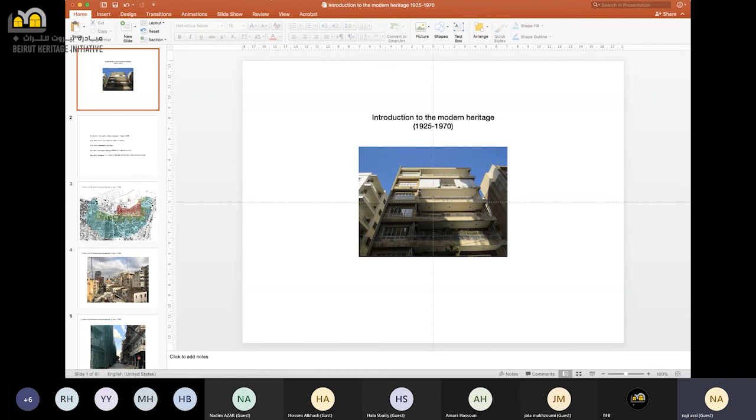All right, so we will be going through five chapters. An introduction that highlights the impact of the explosion that occurred one year ago on the city. Then we will have an overview of the modern heritage according to four periods, or sub-periods, historical periods.

1925 to 1935, what we call the interwar period, when we witnessed the integration of reinforced concrete in architecture. 1935 to 1945 coincides with the independence of the modern Republic of Lebanon as we know it today, during which we witness the French influence, namely Art Deco styles and affiliated styles and languages.

1945 to 1955, the post-independence period, during which we witnessed the work of architects and engineers who were actively taking part in shaping the city as we know it, or most of what we know of Beirut from that period. 1955 to 1970, the mandate of Fuad Chehab and the entrepreneurial state, during which we witnessed the spread of modernism and the international style.

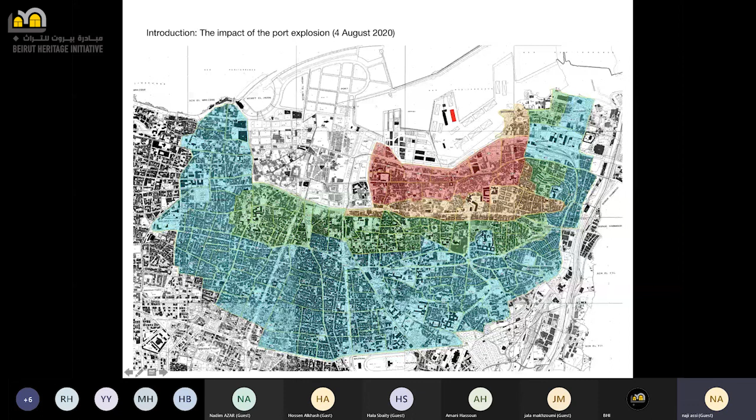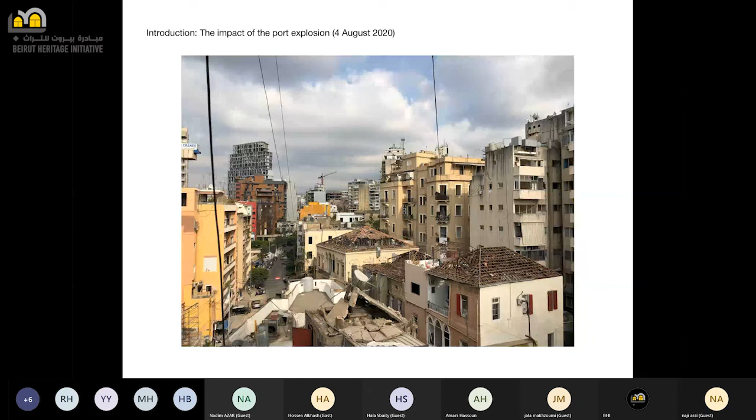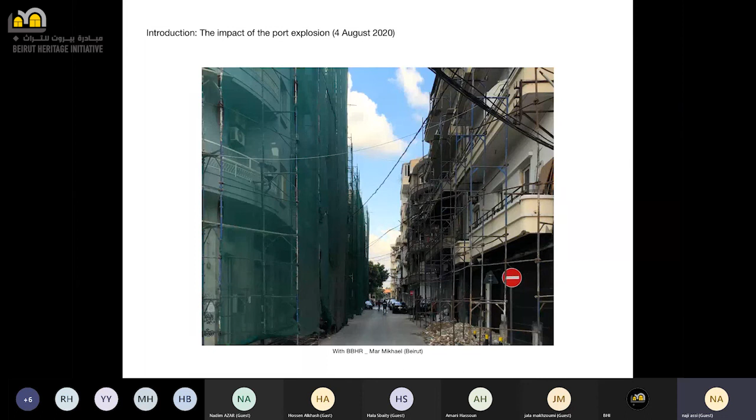Another photograph on Pharaon Street, where you can see that parts were already under renovation. Here we were working in Mar Mikhael on a cluster of buildings in collaboration with the AUB Neighborhood Initiative.

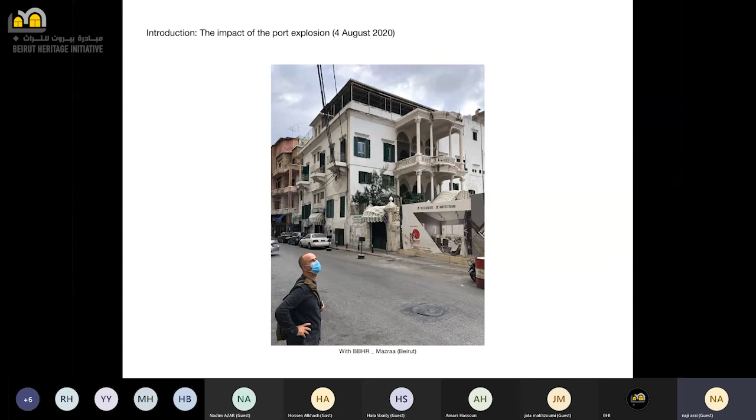I also took part with BBHR and APSAD in the surveying and assessment of damaged neighborhoods. With the Arab Center for Architecture, we also organized targeted tours to highlight certain aspects for the NGOs that were offering their help to the inhabitants to rehabilitate their buildings.

This was crucial because many people found themselves unable to tell what to do or what the priority was. The efforts of the BHI are inscribed in this logic of providing the inhabitants of Beirut, regardless of their profession or social status, with the necessary guidance for the rehabilitation works.

Just before I start, this is an overview of what we call the modern heritage. Of course, the modern heritage did not start on a specific date with a specific type of buildings; it's inscribed in continuity with what preceded. My main concern when we talk about heritage is not to isolate specific buildings or monuments, but on the contrary, to always inscribe it in the urban fabric.

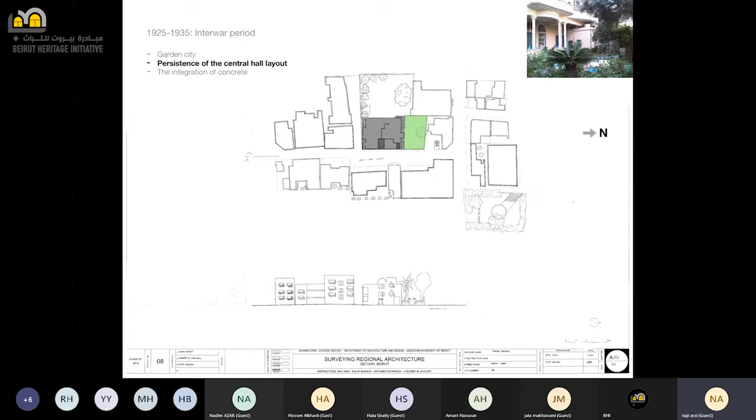Here it's a house in Geitawi. In gray, I highlighted the footprint of the house, and in green its garden. Of course, the central hall was still oriented north to maximize daylight and minimize sun exposure — all the characteristics of the late Ottoman period were still used and applied in this period. Here you can see the floor plans and the strong presence of the central hall, with the organization of the house along that central hall.

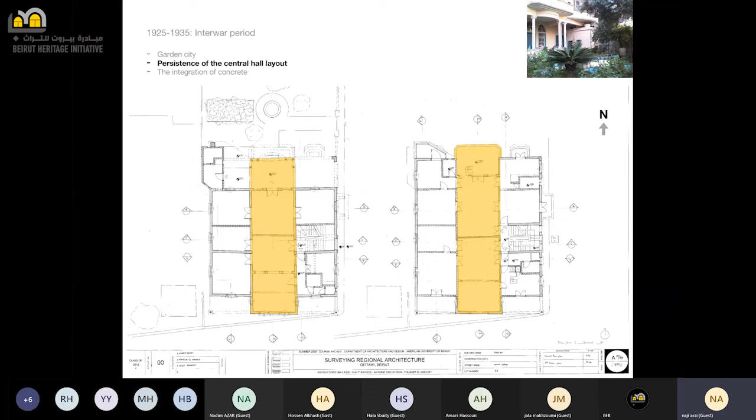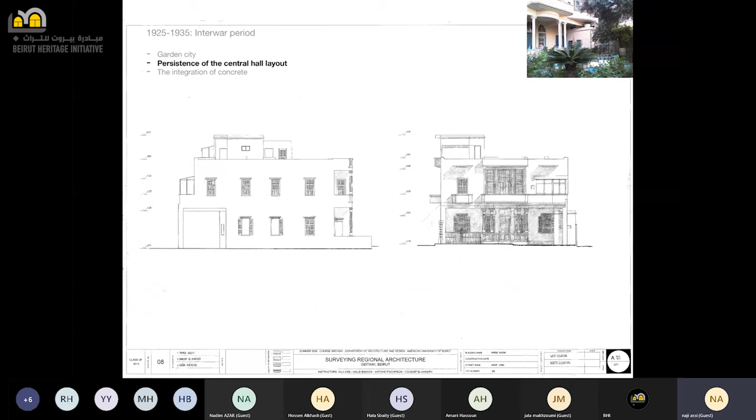The north facade on the right side and the west facade on the left, where you recognize the scale of these houses, 2 floors, 12 meters high, all the ingredients of the pre-modern period were still applied here. But you'll notice that the columns carrying the balcony are in concrete, the balcony slabs are in concrete, so we notice the importance of concrete starting to integrate in these houses.

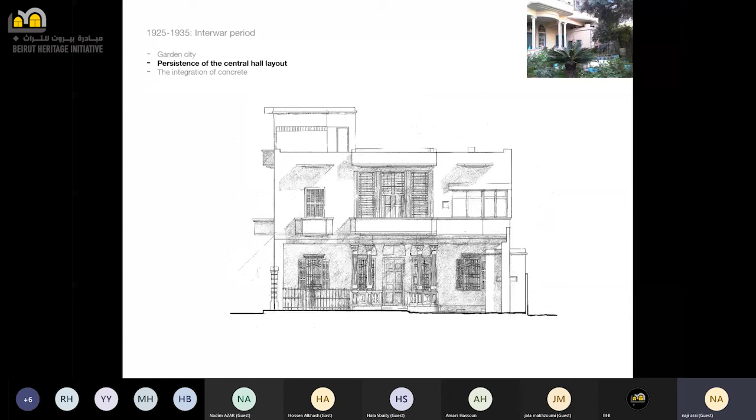So actually, concrete is used for its ease in execution, the flexibility of applying several molds on the balustrades, column elements, capital, base, etc. You can see it here in those examples.

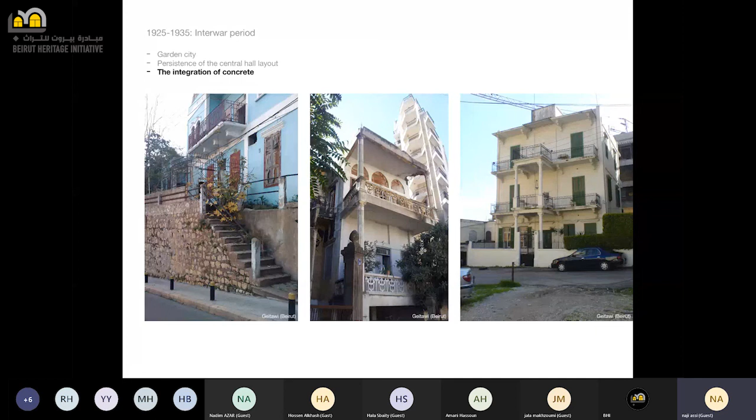Concrete is also used to cover the facade as a finishing material, so plaster becomes cement-based plaster. You can see in these two examples from the area of Geitawi how this new material allows creating a texture, a pattern, and technically these solutions would avoid the problems you could face when applying plaster on an entire surface without joints, where you'd encounter cracks and other expansion constraints. So here the hexagonal pattern allows for that.

In many cases, when I see houses being refurbished or restored, people nowadays are simply removing that skin, that finishing layer. I believe it should be preserved and restored because it expresses a certain period and a certain know-how of the history of our local architecture.

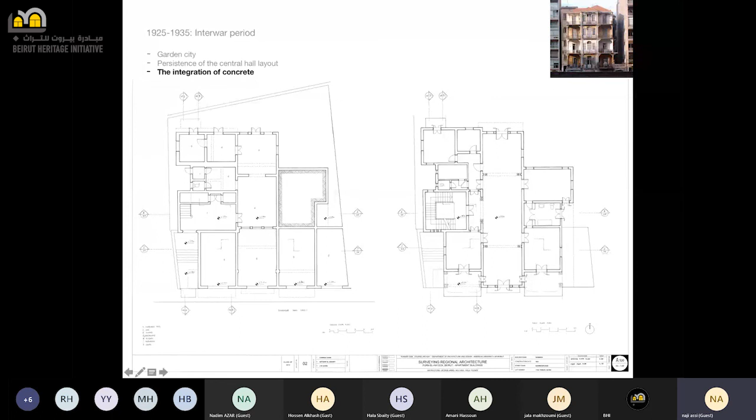You can notice the grid of the structure. We can read it in several locations where you can identify an additional thickness or the columns, etc. All of these elements are made of reinforced concrete.

The elevation shows the prominence, the persistence of the central hall, like we said earlier. We see the commercial ground level, and we see an elaborate wrought iron work of the balustrades.

And again, remember that the concrete here, despite the drastic change in construction techniques, still imitates or adopts the elements that were known to the builders when these houses were built with stone.

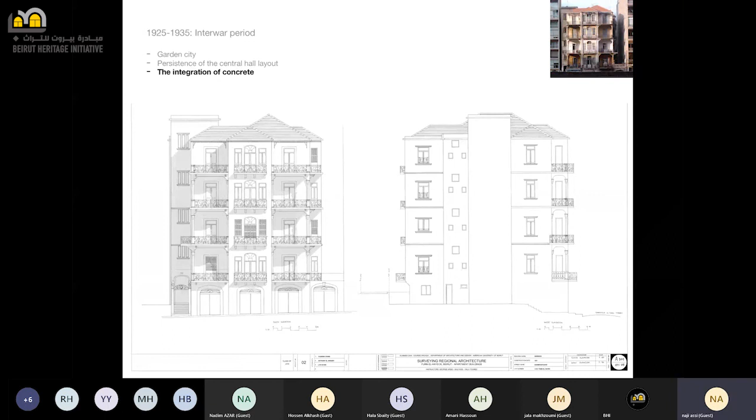The Mar Mikhail corner building, where the grid of the columns is very clear. It organizes the space. All the columns are connected with drop beams. Quite impressive. This building belongs to the Maronite community. The Maronites built around the EDL site that we know today, built several housing projects, and this is one of them.

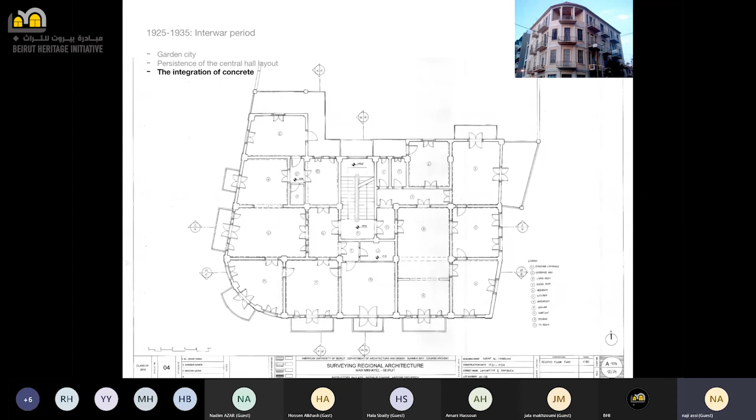All right, so the concrete not only punctuates the space, but also is the main composing element of the facade, in which between the columns, the pillars, and the slabs, we inscribe the openings having the same proportions, the elongated proportions that we know or that we inherited from the Beiruti house.

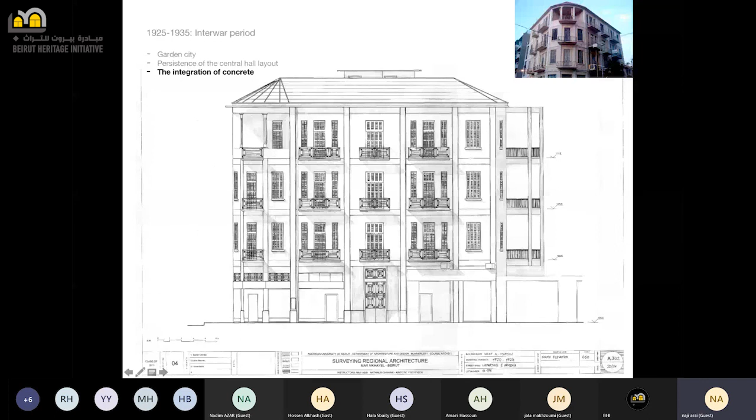Moving on to the second period that we entitled the Mandate period, marked, of course, by the French Mandate, and during which, as I mentioned earlier, we witnessed the strong influence of European styles like the Art Deco and even in some instances Art Nouveau patterns and motifs. So we're gonna talk about the expansion of the city, what I call the Transitional Plan, and we're gonna see a few examples of this Art Deco influence.

So in the 40s, Beirut was still expanding along its main arteries, but we notice in the map here in black these installations of the French army, of the French mandate military regiments. And I could venture and say that these installations are kind of surrounding the city from east to south to the west. And of course, we have to mention that during that period, the port of Beirut was undergoing a process of modernization as well.

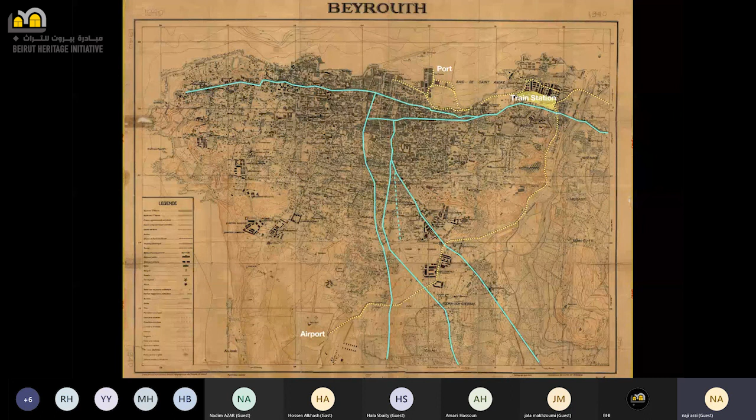The military barracks of the French, of course, use reinforced concrete, but following a certain classicism in the volumetric expression, in the proportions of the openings, corresponding to the construction techniques of that period.

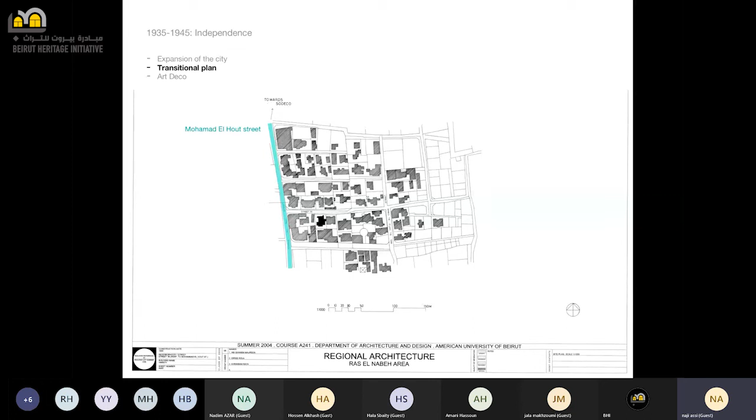So this is Mohamad El Hout Street on the left, and in black, the Harati building that we surveyed. Many of you are familiar with these examples found around the outskirts of the old city.

So what are we looking at here is a 3-bedroom apartment with amenities, living space, etc. You recognize the massive staircase connecting the floors. Of course, note that the floor-to-ceiling height is still a generous dimension, 3.5 to 3.8 meters, hence the length of the stair flight.

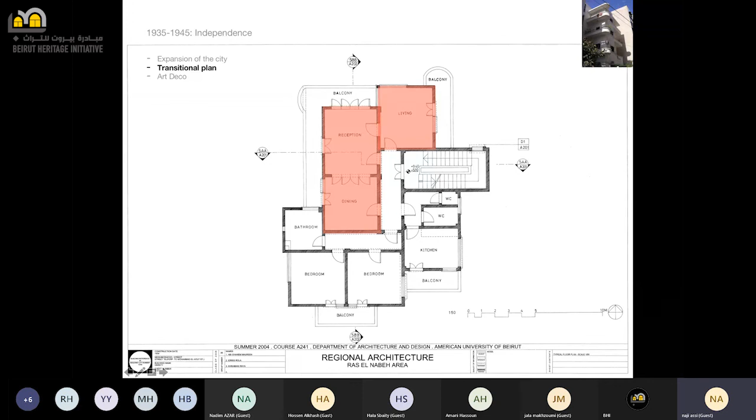But more importantly is the presence of this living, reception, and dining space, elongated just like in the old typology of the central hall. Notice the living room on the side—I'll try to give an explanation later. Then we have this serving corridor and the different functions connecting to it: the kitchen and service area, and the bedroom sleeping area with its bathroom.

So what happens here is that we are in a different mode. We are separating the private from the public. We are no longer distributing the different rooms from the central space. This is an important change that will go on developing in the coming years, with certain moments of awakening—we'll find some later examples with a more rigid centralized distribution. But this breaking of the plan according to functions, which is a very modernist approach, will evolve to become the modern buildings we know today.

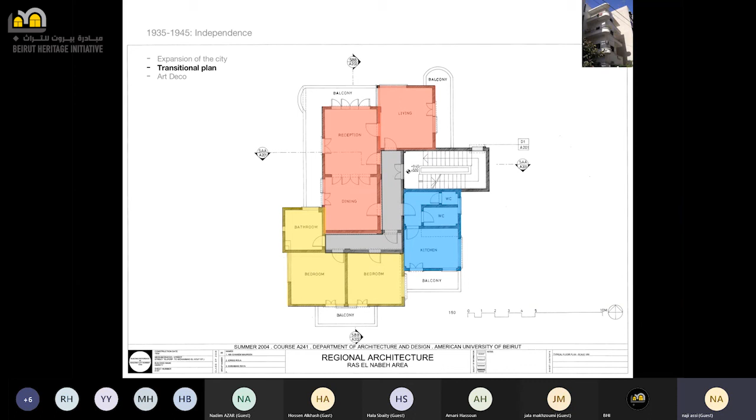This is the facade. So, of course, the facade becomes asymmetrical. There is a kind of balance between the staircase volume and the rest of the building, the apartment itself, and then a balance between the elongated balcony and the frontal balcony, etc.

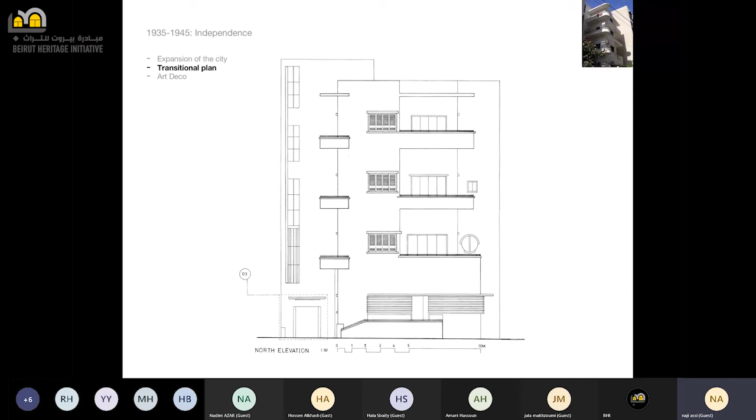Another example in the Geitawi area, an individual house, one floor here, but that could have been 2 floors. Again, we're going to look at this organization of the space: high ceiling, hence the length of the stair flights, and the importance of the structural grid, as you see in the plan.

The same observation applies about an asymmetrical central hall with a side living space, amenities, kitchen, etc., and the private area of the bedrooms. Now concerning this lateral space in red, the side room—in many cases it's a winter room where the family could stay, or a separate reception space away from the family space. It's either/or, not only separate for guests or winter for private use.

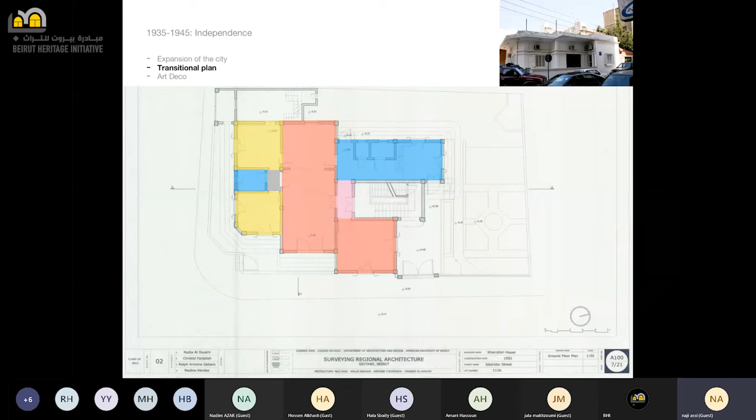It can be either or, depending on the social context in which we are. The elevations of this house, and you notice the visible structure in which we see the walls that are slightly recessed.

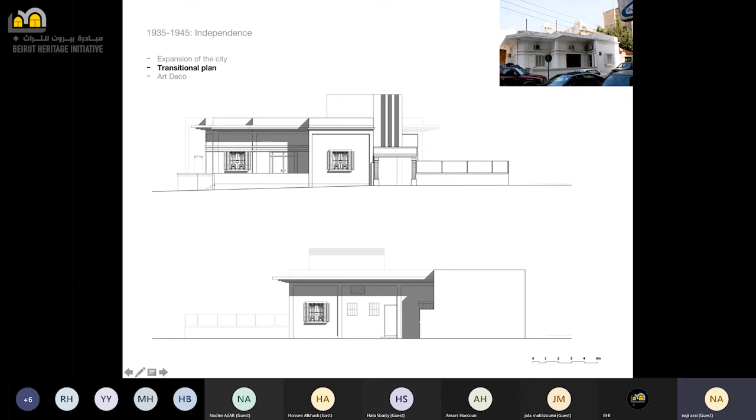All right, so the third sequence or period that I'm suggesting in this reading is the post-independence period, 1945 to 1955, in which we will witness the densification of the city. Obviously, in this image, you see that we are talking about ground plus 5, ground plus 6 floors, a functionalist layout of the apartments, and we're gonna look at these buildings with the lens of the profession, meaning identifying the work of architects and engineers, and a couple of words about the zoning laws and regulations that were being established during that period.

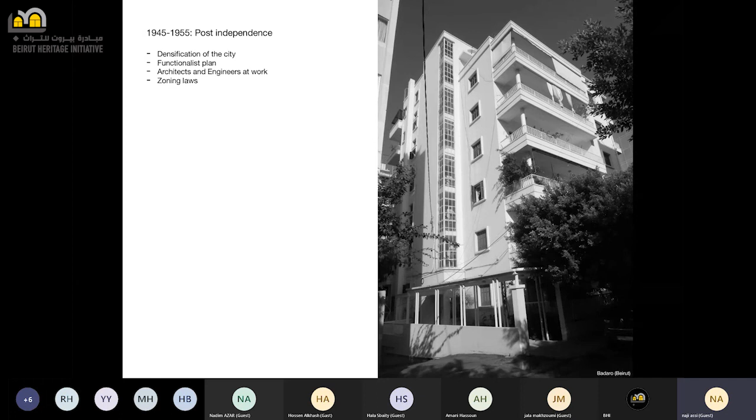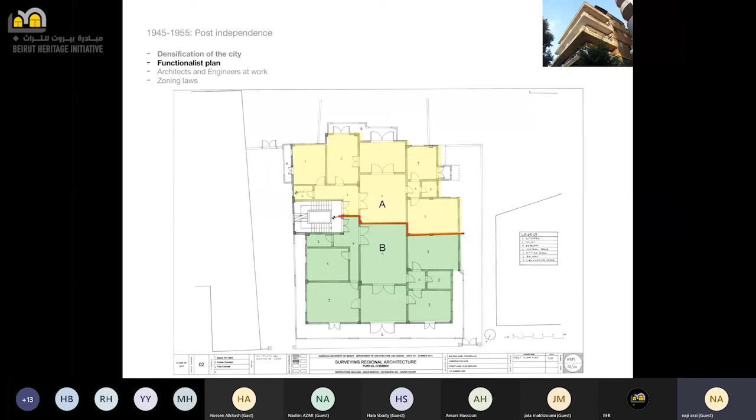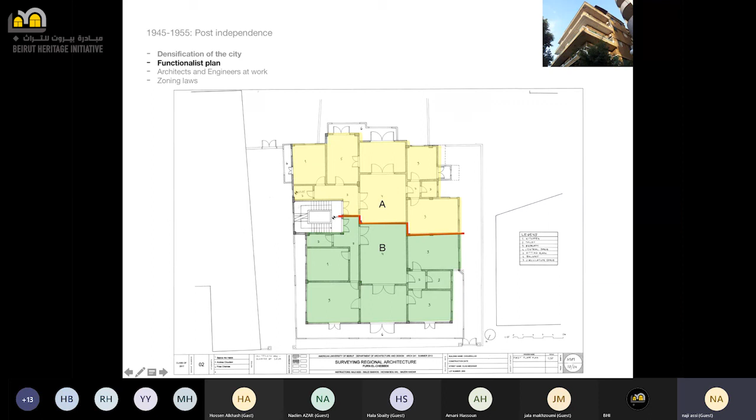Well, this is the drawback of this densification process and the commercial aspect of the development of apartment buildings intended for rental. So A and B are two different apartments with still the presence of the central hall, split in two, with an internal door that would allow natural light to reach the inner part, and the distribution of the different functions around that central hall through what I call service buffer areas, or small corridors that you see here in number 7 in both cases.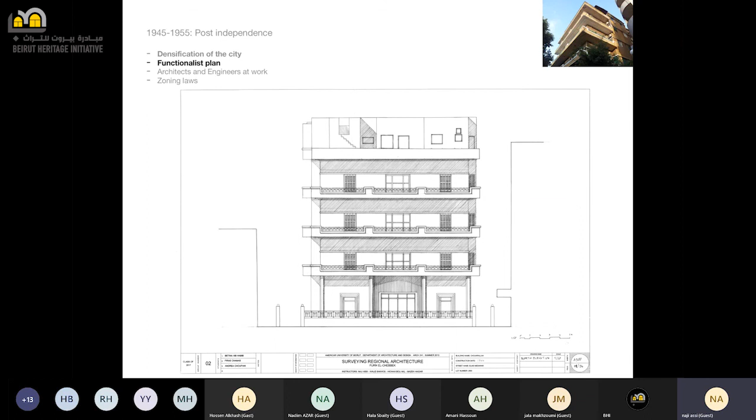Okay, this is the elevation of that building. Another example along Damascus Road in the Badaro area, Badaro Adliye area. And the two buildings are really a good testimony of that period.

The first one, you identify two identical blocks served by a central staircase. And during that period, the idea of the staircase expressed very often volumetrically, and it operates as a light well in the building, so a lot of glass along these stairs.

And you notice that right and left to the stairs, you identify a triple opening here that would eventually be the living space. So you see how scaling and densifying this inherited city creates new typologies, but there are constants like the ones we are encountering now.

Also, you can identify the finishing with the plaster, and the plaster has a kind of grid, a kind of geometric subdivision, again, that would allow it to sustain that area without cracking, or without expanding or shrinking beyond the joints or the grooves created by that grid. On the left, a freer plan, a freer layout, and a balcony.

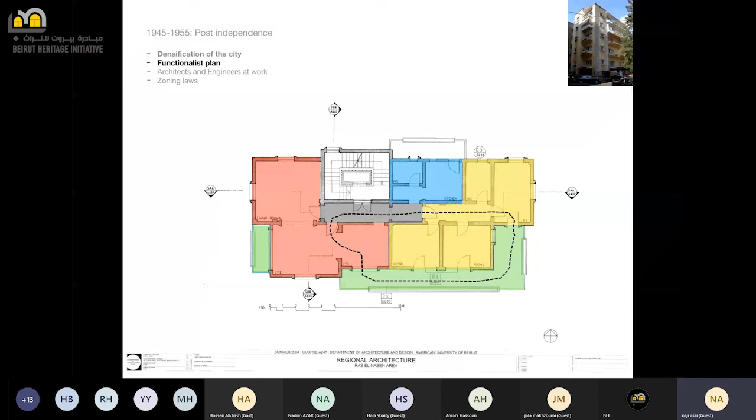I lived in an apartment like that, and it's really rewarding to have the ability to move freely in the house without feeling that you have reached a dead end.

Okay, this is the elevation of that building. One thing I want to highlight is the clarity of the volumetric intention, as I said earlier. Notice how the flower box is suspended on the balcony and is read as a different element, not integrated with the balcony itself.

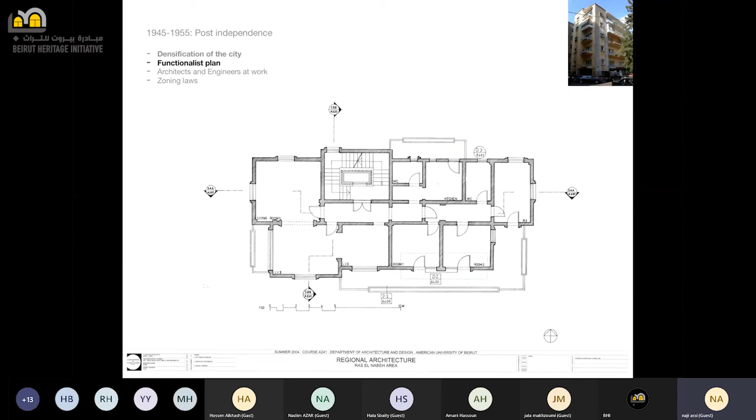If I go back to the photograph, you will see it here. Notice how subtle this detail is. Actually, it contributes in sustaining the proportions and the elegance of the length of the linear element that is the balcony. In some cases nowadays we lose somehow this hierarchy in the volumetric reading.

Another example by the same architect, and you notice here the same features I mentioned earlier: proportions of mass and void, grid of the plasterwork framing the windows. By the way, I didn't mention this earlier, but the use of concrete here is still used to the benefit of the performance of the building. Notice how the windows are protected with this concrete frame that allows for the projecting shutter to operate.

Within a legible frame, notice the linearity of the balcony and the flower box I mentioned earlier. I won't extend a lot on the minute detailing of the cornices on the top, the framing of certain volumes. All of this contributes, despite the densification and moving to a different scale of buildings, to sustaining the residential aspect and the proportion and scale of the building.

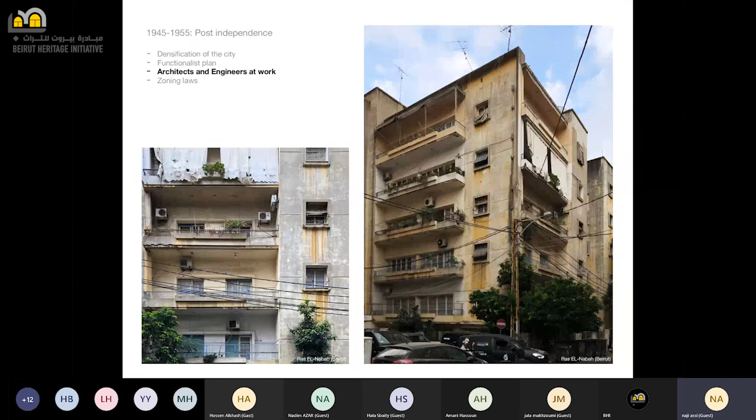So in the next examples, I will show some buildings that are definitely the work of engineers and architects. I chose on purpose not to name or mention any, because then it would be unfair and the list would be too long. So these are in the area of Ras El Nabeh.

Similar observations as the one we did before: asymmetry. Notice balcony versus mass creating a kind of asymmetrical facade, but that is balanced at the same time, because we understand that this is the outdoor space offered for the apartment, etc.

Compare the building on the left with the building on the right. This is something I won't develop a lot, but here we can recognize through the materiality of the building which one is newer. Whenever you have wood shutters, it would mean this is an older building compared to the one to the right, where you have steel frames for the window and no wooden shutters at all.

Notice the very delicate and sensitive work of the balustrades. I argue that the steel work or iron work in terms of the balustrade or limitation of these balconies would offer a lot of transparency and sustain proper ventilation of these spaces. On the building on the left, you notice the clarity of the structure with this round column on the corner.

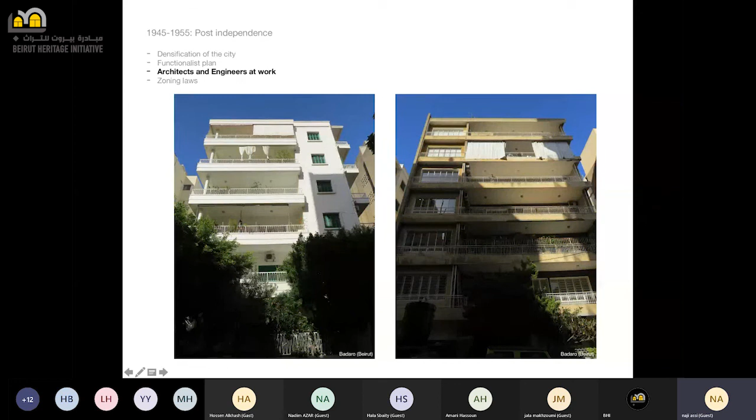Another example where we see the use of ceramic tiles, colored ceramic tiles on the balcony parapets. This will be used more and more as we move towards this modern period. In this case, there is an alternation of the colors that I find interesting. It creates a certain rhythm. It breaks the scale of the building.

This is one apartment, by the way. We're going to look at the floor plan later on. You notice also a pilotis floor on the image on the left. We'll discuss this also later on.

What I also want to highlight in these buildings is the clarity of the structure. You see the columns and the drop beams on the ground level carrying the building and constituting the pilotis floor, which is not only columns, but columns and beams combined together. And it's emphasized by these beams reaching the outer edge of the facade.

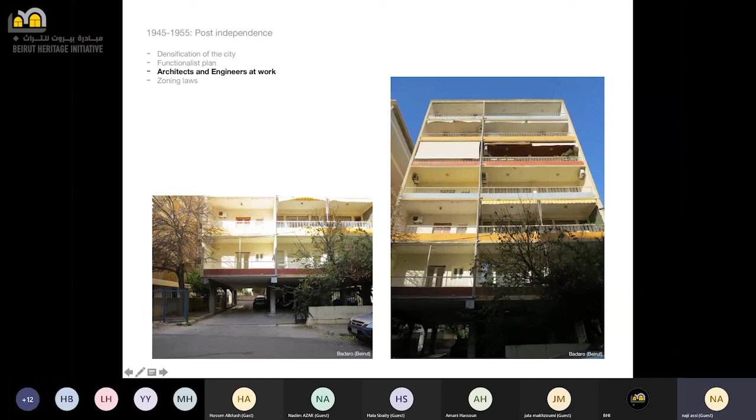So this is the floor plan of this building, taken also from AUB students' work in the context of a vertical studio. I'm showing you this plan to again underline the importance and central position of the living room, also with its lateral smaller sitting area. You see it here on the right, bottom right.

And all this, the public separated from the private, here expressed in beige, which are the bedrooms. I find it weird that the balcony is split in two like this, but probably it's a choice of the owner, or probably of the architect. I don't really know, but it's a bit misleading when you look at the building from the outside. At the same time, it's coherent in plan because each of these rooms, except one, has a balcony, along with the main balcony for the living room.

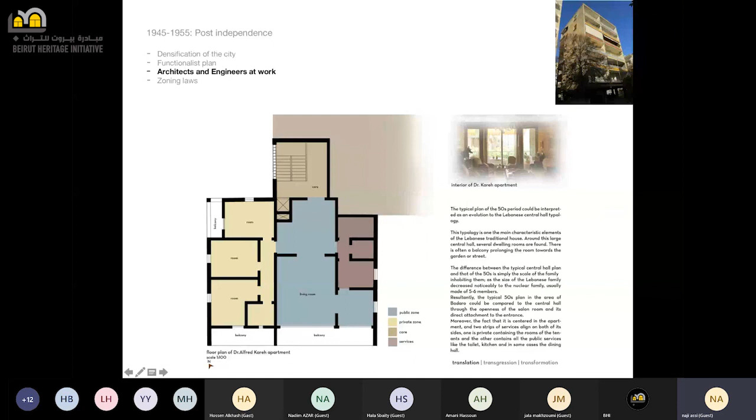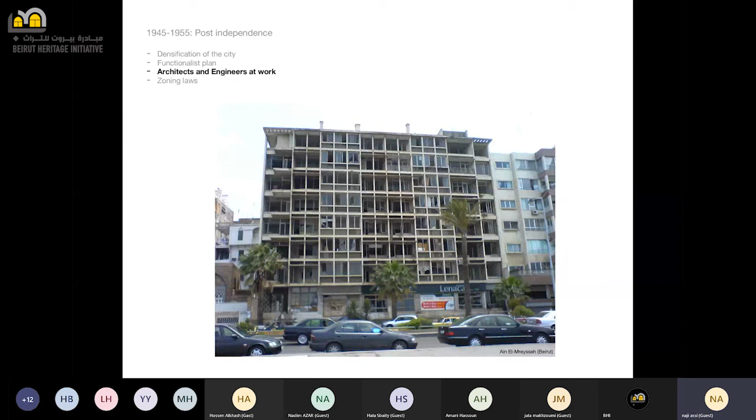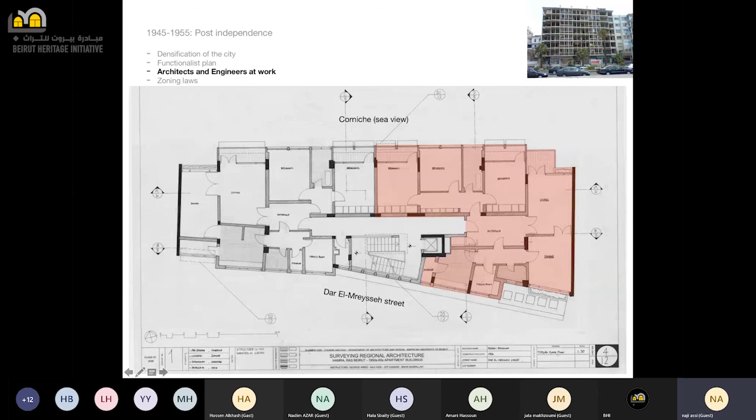The particularity of this building is the total liberation of the facade through this two-dimensional grid that you see, and at the same time, a very elongated layout organized along a common corridor articulating two apartments. So 3 bedrooms, but humble sizes of living, dining areas.

Now we are no longer in the pattern of any persistence of a central hall, but what is particular here are the living dining areas that are on the extremity of the plan, right here on the right side and on the left side.

The building faces the Corniche, hence the sea, hence this grid and the repetitive module that opens up to the sea. On the back side, it's the Dar El-Mreysseh street. You see how the building adapts to the urban situation, and this geometric distortion is taken by the main stairs, and in the apartments by the service areas. So you see here the two living dining spaces for each apartment.

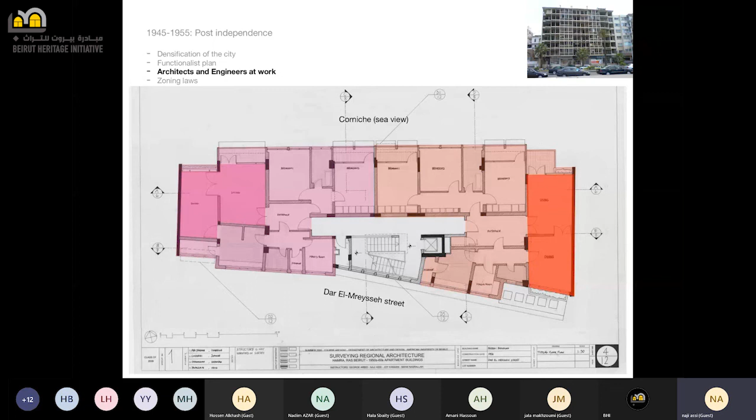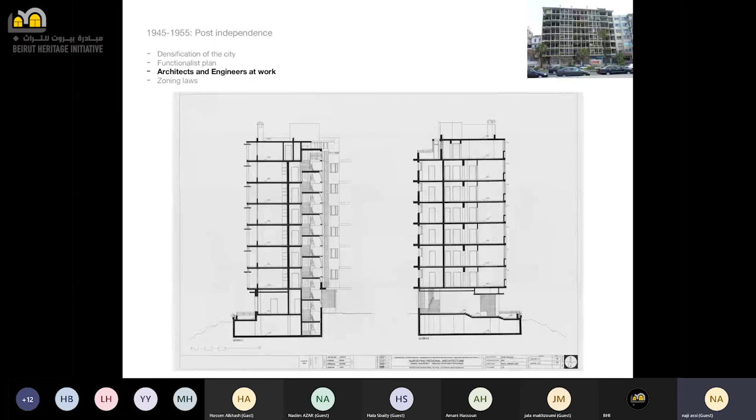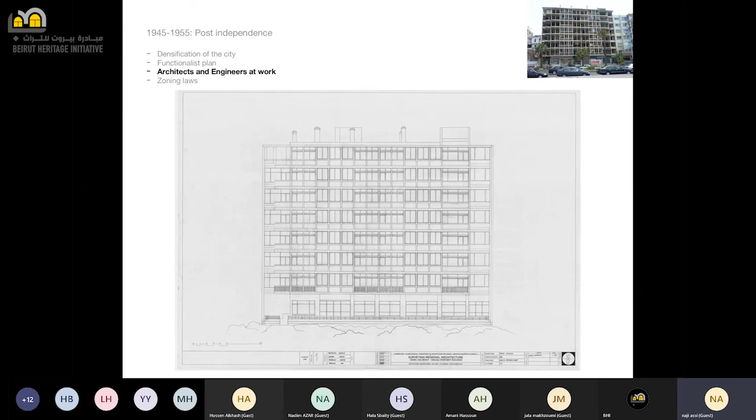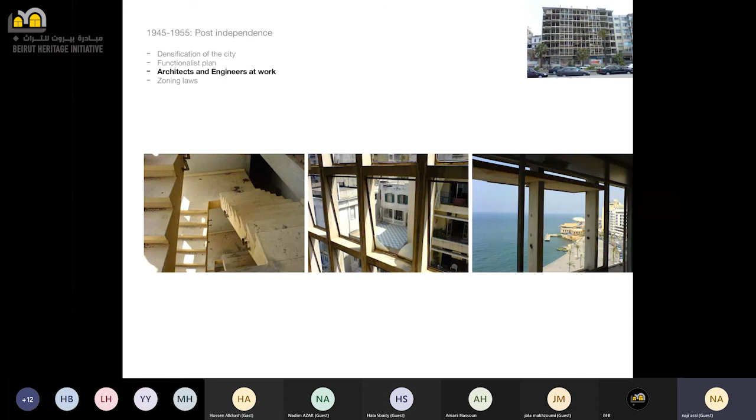This is the main facade. It's oriented north, of course, luckily, so a lot of light and maximum sea view. A few photographs of the internal common stairs, building staircase, and you see the geometric adaptation, and the two other photographs showing the views to the sea and the view to the Dar El-Mreysseh neighborhood through the grid of the facades.

We have to mention a few important regulations and laws that were issued during that period. I will name a few of them to give you an idea about what caused at the same time this, what allowed this densification to occur, this stacking of the floors, this expression in the verticality.

So between 1940 and the mid-1950s, there was a law that abolished the limitation in height of 26 meters, and created a regulation for buildings reaching 40 meters high. There was the possibility of building a pilotis floor, and we've seen several ones previously in the previous slides. There was, under the Ecochard planning, what we call the zoning. So there are exploitation factors that govern the density in the footprint and in the built-up area. And more importantly, we will see later on, the merger of parcels was allowed. So we will witness a change in scale of the urban fabric.

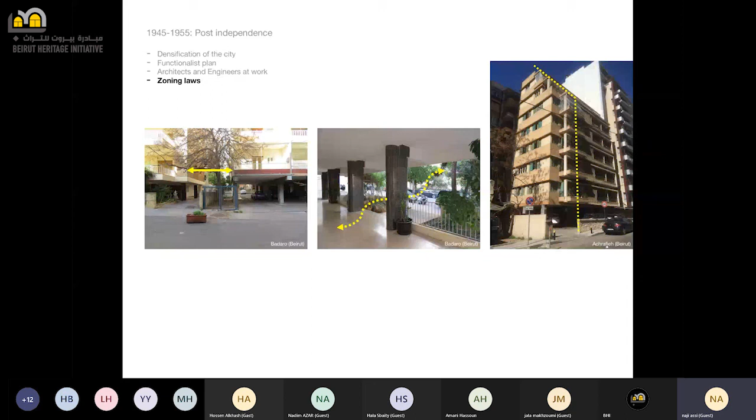The last period, chapter: Chehabism and the entrepreneurial state. I'm suggesting to look at this period through the Charles Helou, the massive Charles Helou station project.

The Chehab period or mandate was marked by the strong presence of the state and witnessed several reforms in the administration and in the construction of a modern state in all its agencies, whether cultural, educational, in terms of infrastructure, industrial, etc.

So we're going to look at the notion of Greater Beirut or Beirut al-Kubra in Arabic. We will witness the spread of what we call the international style, led by, again, engineers and architects, and how the merger of parcels, the setbacks, the sanitation rules are also changing the architectural typology.

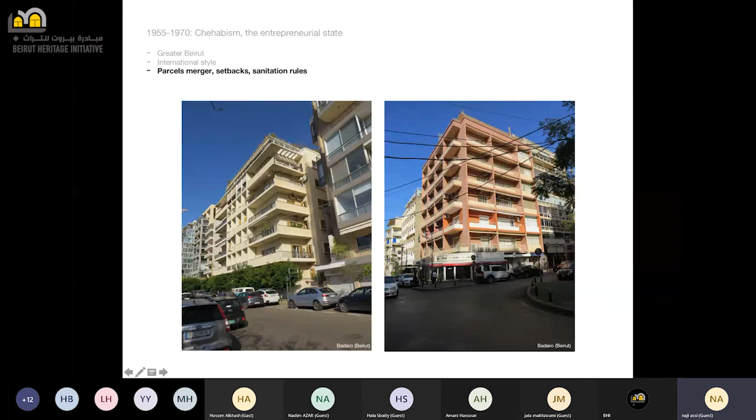Further into the 60s and early 70s, we notice a kind of reduction of the notes, or of the elements. On the left here, this is in Badaro, typical of the late 60s, early 70s, with the aluminum railing on the balcony and a quite minimalistic expression of the architectural elements: balconies, a blank wall, and that's all. On the right side, an office building.